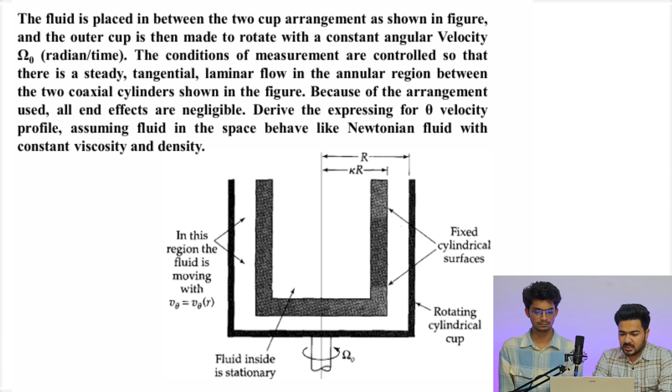So now as we have read the problem, we can see that this problem describes a classic fluid mechanics scenario known as the Couette flow of coaxial cylinder system. This type of flow occurs between two infinitely long coaxial cylinders where one cylinder is stationary and the other rotates with an angular velocity. We need to find its velocity profile and flux profile.

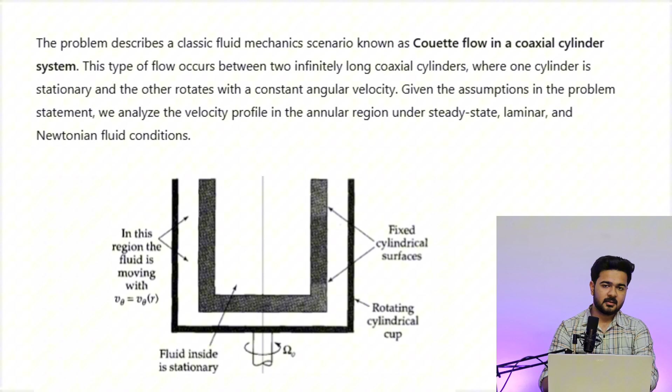So let us list out the assumptions which will be necessary for this problem. To derive the velocity profile equation, we have made several assumptions. Let us list them down.

Firstly, the flow is steady state. That is given in the problem. The explanation is that the system is assumed to be at steady state, that is the velocity does not change with time: del v theta by dt is 0, meaning v theta velocity is not changing with time. The outer cylinder rotates at an angular velocity omega naught, and the inner cylinder is stationary. Since there are no transient forces or time dependent inputs, the flow remains unchanged over time.

In real world application, if the outer cylinder suddenly starts rotating, the flow would initially be unsteady. However, after a short time, the system reaches an equilibrium steady state and velocity stops changing with time. So we are assuming that the system has already reached its steady state - we have started the problem when it has already reached steady state.

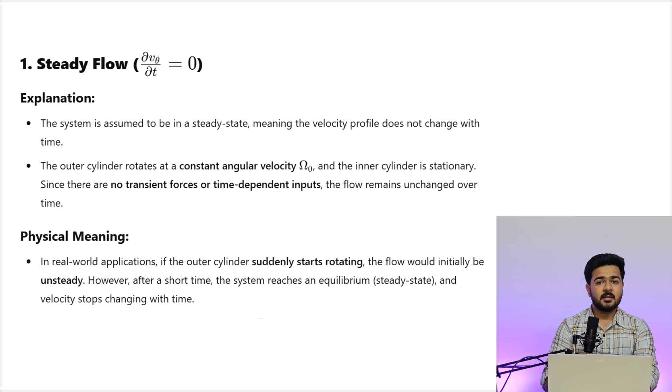Secondly, the flow is axis symmetric, that is, it is symmetric around theta. So velocity theta is not changing in the theta direction, that is del v theta by d theta is equals to 0. So there is no dependence on angular coordinate theta because the system is cylindrically symmetric.

Cylindrically symmetric: the fluid velocity at a given radius r is the same at all angles around the cylinder. Since the problem involves a rotating outer cylinder and a stationary inner cylinder, no preferred direction exists in theta, meaning velocity changes only in the r direction and not in the theta direction.

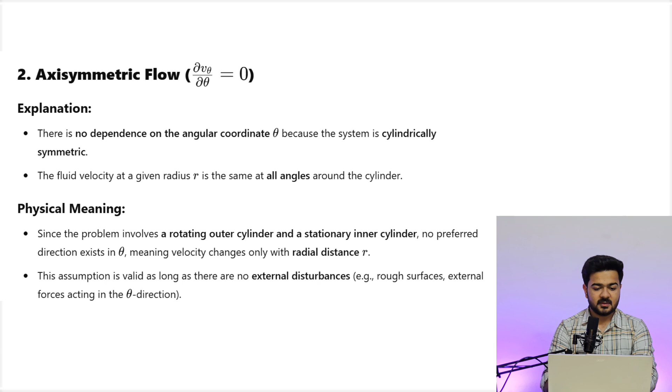This assumption is valid as long as there are no external disturbances, such as rough surfaces or external forces acting in the theta direction.

The third assumption is that the flow is fully developed, that is, del v theta by del z equals 0. This means v theta is not changing in the z direction. The system is assumed to be infinitely long in the axial direction, meaning flow properties do not change along z, since the coaxial cylinders have infinite length. Velocity only varies in the r direction.

Physically, if the cylinders are very long, then far from the ends, fluid elements experience the same forces everywhere along the axis, meaning forces in the z direction are the same everywhere in the fluid. This assumption is used in practical problems where end effects, that is entrance and exit effects of finite cylinders, are negligible, so v theta is not changing in the z direction.

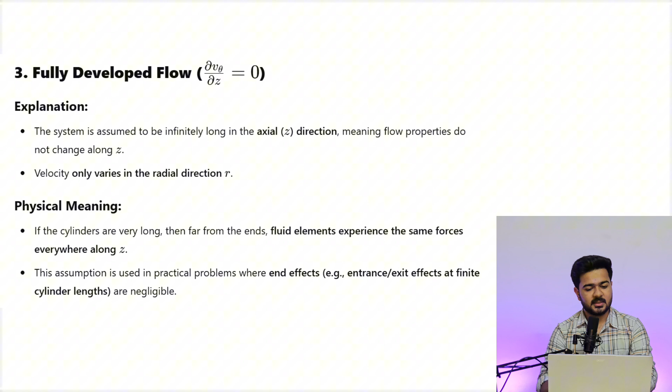The fourth assumption is that the fluid is Newtonian, with constant viscosity, so we can apply Newton's law of viscosity in the problem: tau, the momentum flux, equals mu

times dv by dy, that is velocity differentiated with respect to y, where tau is the shear stress directly proportional to the velocity gradient. This means the fluid has constant viscosity, that is, the fluid is Newtonian.

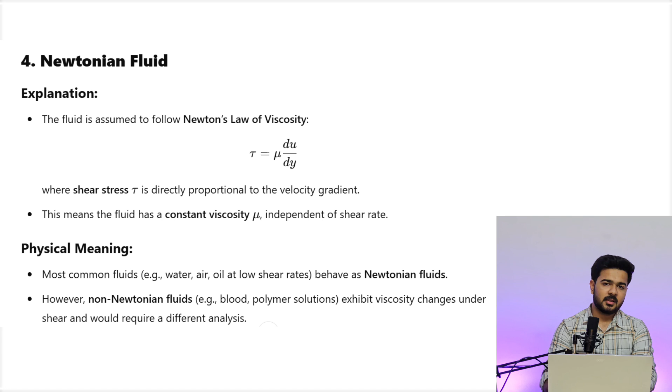Physically, the most common fluids, such as water, air, and oil, behave as Newtonian fluids at lower shear rates. However, non-Newtonian fluids like blood or polymer solutions exhibit viscosity changes under shear and require a different analysis, since for them we cannot use Newton's law of viscosity and need a different approach.

The fifth assumption is that there is no radial and axial velocity, meaning the velocity in the r direction and the velocity in the z direction are zero. The fluid moves purely in the tangential theta direction, so the flow is only in the theta direction, as given in the problem.

There is no radial flow component, Vr, because the wall prevents movement towards or away from the center. And there is no axial flow component, Vz, because the problem is radially confined and assumed infinitely long.

Physically, if there were a pressure gradient in the radial or axial direction, additional velocity components Vr or Vz would arise. But here we assume the pressure throughout the liquid is constant, since it is an infinitely long cylinder and properties are not changing, so Vr and Vz are 0.

However, in this problem the flow is purely rotational and driven only by the motion of the outer cylinder, making the assumption valid, since we are not considering the effect of gravity.

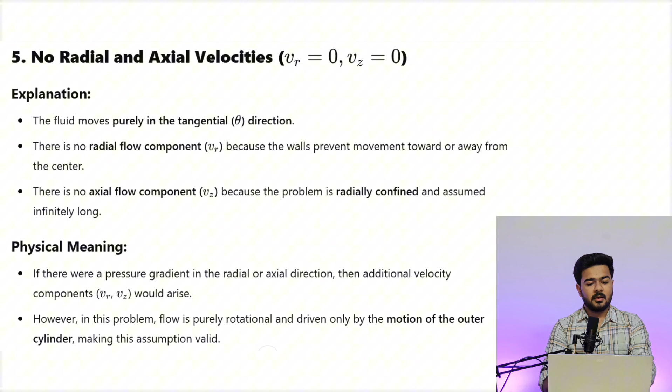The sixth assumption is negligible pressure gradient, that is, del p by del theta equals 0. We are assuming that pressure is not changing in the theta direction.

There are no external forces in the tangential direction except for the shear force from the rotating outer cylinder, so there is only the drag force through the walls of the rotating outer cylinder.

If there were a pressure gradient in the theta direction, it would introduce additional tangential forces, but in our case it is not like that. Physically, in Couette flow between moving plates or cylinders driven by shear, motion is not pressure driven, it is only driven by the drag of the moving boundary of the cylinder.

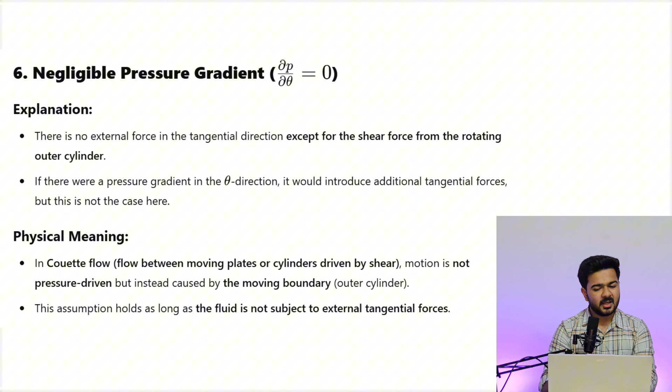Here, in our case, it's the outer cylinder. The assumption holds as long as the fluid is not subjected to external tangential forces, so here we are not taking any tangential forces; our system is at steady state.

The seventh assumption is no-slip boundary conditions. We consider that there is no slip between the fluid's last layer and the layer of the wall, meaning they are rotated at the same velocity, so there is a no-slip condition.

It is written that the no slip condition states that the fluid in contact with a solid surface has zero relative velocity with respect to the surface, that is the same meaning. At the inner stationary cylinder, where r equals kappa r, the tangential velocity is 0, that is v theta at kappa r equals 0.

At the outer cylinder, where r equals capital R, the tangential velocity matches the velocity of the cylindrical wall, that is omega naught times R. This is the velocity of the outer cylinder, and the fluid's last layer also moves with the same velocity, so there is no slip between them.

The assumption is experimentally valid for viscous fluids that we are using, like water and oil, all of which are incompressible. At the molecular level, fluid molecules stick to the solid surfaces, creating a boundary layer that enforces this condition.

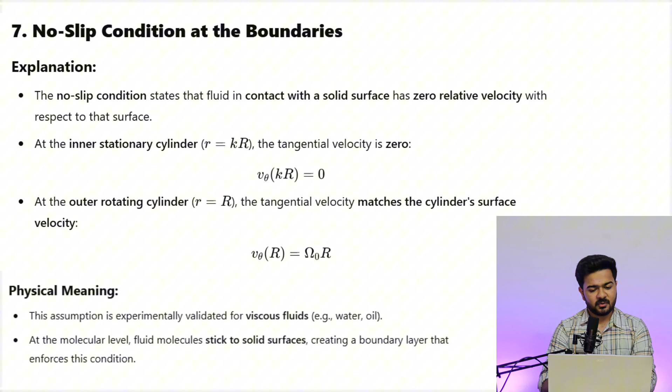Our eighth assumption is that the flow is laminar. The explanation is that the analysis assumes the flow is laminar, meaning fluid layers move smoothly without chaotic mixing. This is only a one-dimensional flow, and it is a laminar flow.

There are no turbulences, and the Reynolds number is given by rho v theta r by mu, and the Reynolds number remains in the laminar region, that is less than 2000, in cylindrical geometry.

If the outer cylinder rotates too fast, the flow may become turbulent, introducing additional fluctuations. But here it is stated in the question that the cylinder is moving at a slow speed. The assumption is valid when rotation speed is moderate and the fluid viscosity is high enough to damp turbulence. So it is valid when the speed is moderate, and we have assumed that it is a slow speed.

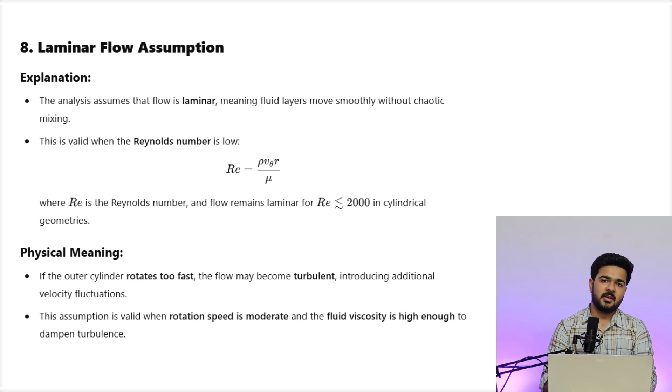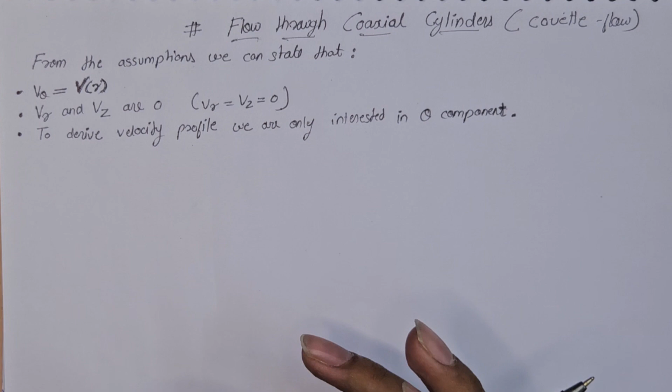So in our case, the flow is laminar, and all these assumptions are valid. From the assumptions, we state that v theta is a function of r only. As v theta is only a function of r, this is due to the 1D laminar flow, and as the velocity is symmetric within the theta direction, velocities in the z direction are 0.

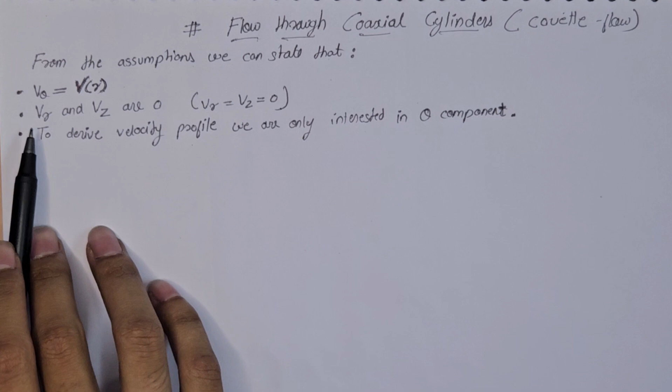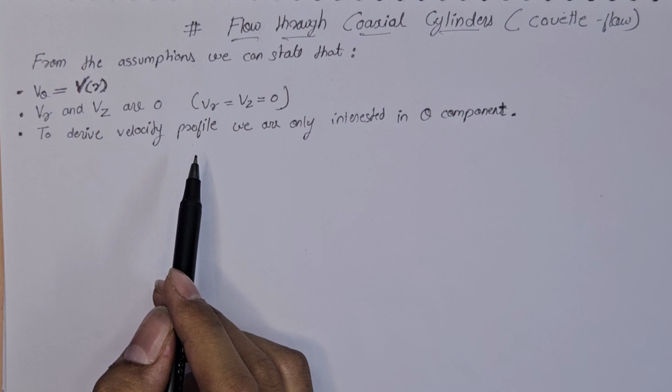Again, Vr and Vz are 0, because of the negligible end effects. To derive the velocity profile, we are only interested in the theta component, because the velocities in the r and z directions are 0.

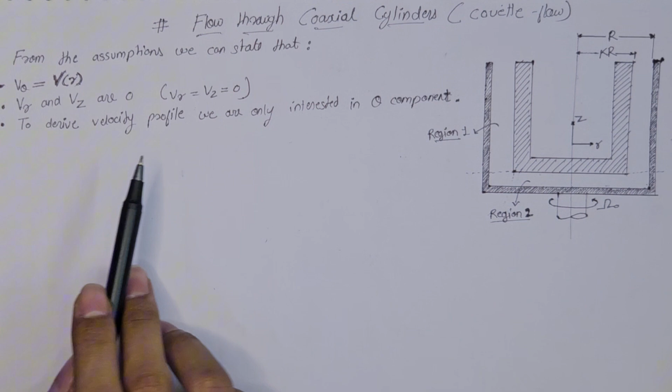Now we will use the Navier-Stokes equation in cylindrical coordinates, using the theta component to derive the equations. Let's write the theta component.

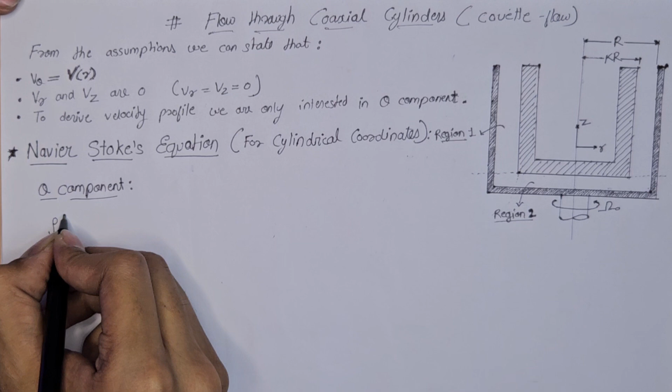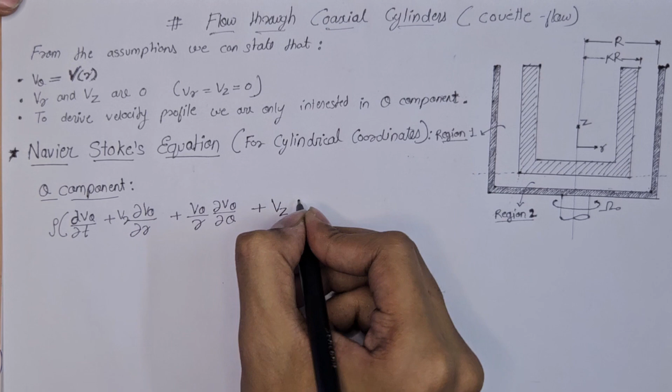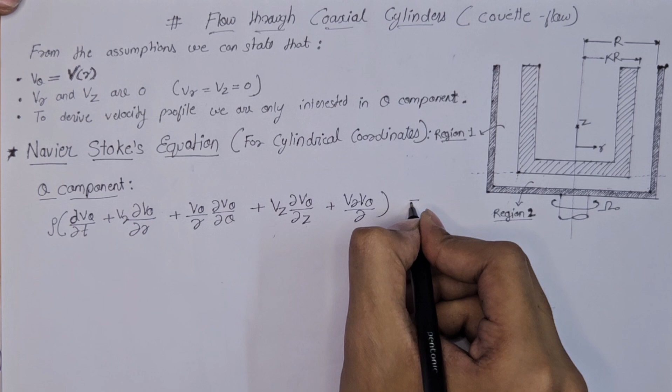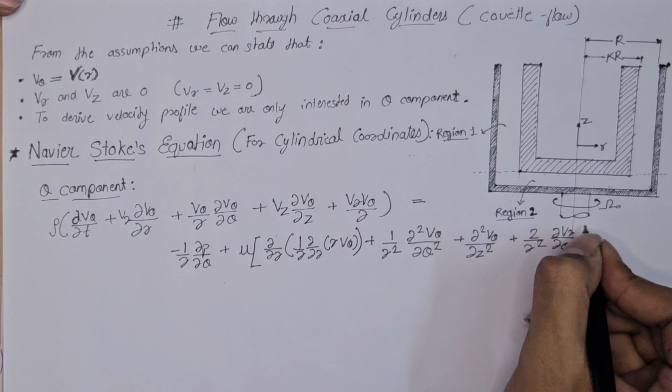The equation of the theta component can be written as: rho times [del v theta by del t plus vr del v theta by del r plus v theta upon r into del v theta by del theta plus vz into del v theta by del z plus vr v theta upon r], which is equal to minus 1 by r del p by del theta plus mu times [del by del r of (1 by r del by del r of r v theta) plus 1 by r square del square v theta by del theta square plus del square v theta by del z square plus 2 by r square del vr by del theta] plus rho g theta.

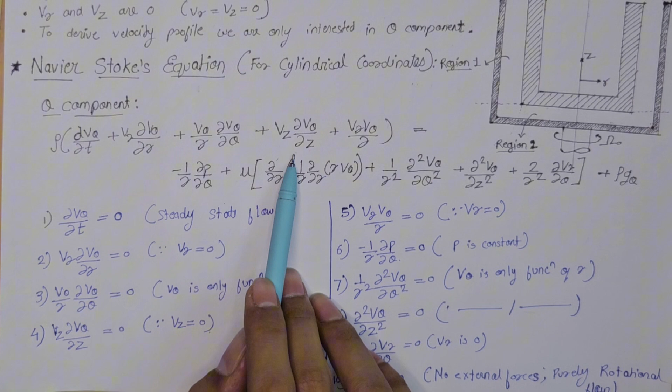Now you can see here we have written the Navier-Stokes equation for the theta component. One by one we'll try to understand how we will use this equation, how these terms will get cancelled, and what the output of this equation will be.

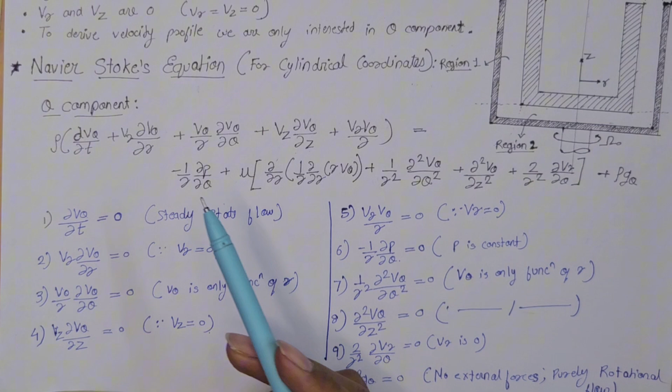As we see here, the first term, del v theta by del t, equals 0. This is because of steady state flow, so we'll cancel this term. Secondly, vr del v theta by del r is again 0. This is because we are given that Vr is 0, so that whole term will be cancelled.

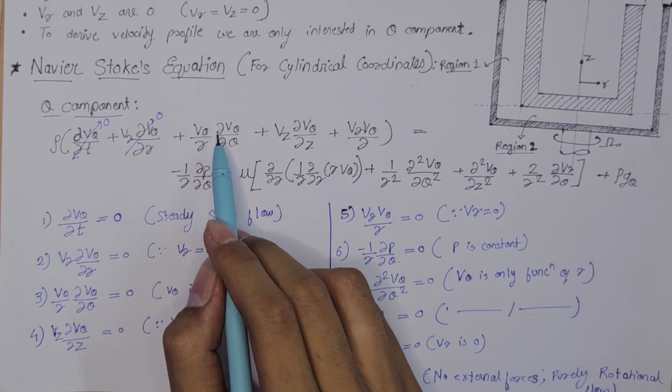Next, v theta by r del v theta by del theta. This is 0 because v theta is only a function of r, so when we differentiate this with respect to theta, it will be 0. So again, this term will be 0.

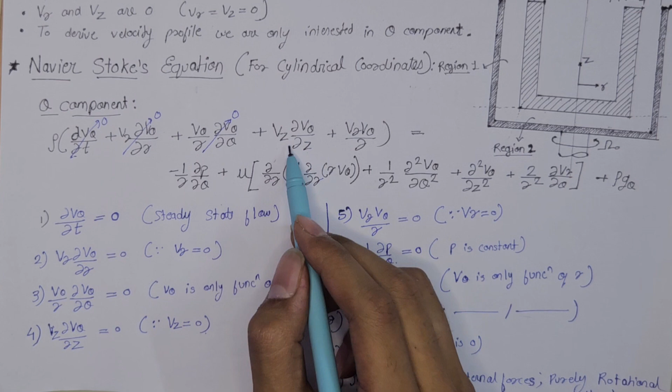Now we can see here Vz into del v theta by del z is again 0. This is because the value of Vz is 0 as we have stated in assumptions. So we cancel this term, this will be equal to 0.

Again similarly Vr into v theta by r is equal to 0. This is because Vr is 0. So again this term will be 0.

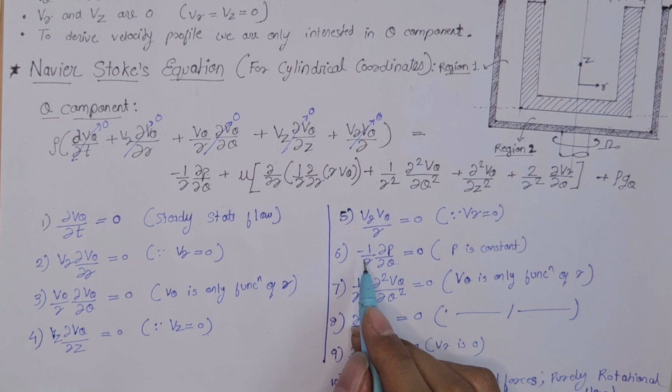Now let's come to the right hand side. So minus 1 by r del p by del theta is equal to 0. This is because the p here is constant. So minus 1 by r del p by del theta is equal to 0, and we'll cancel this term.

Now this term is non-zero because it's not satisfying any of these assumptions above. We'll move on to the next term.

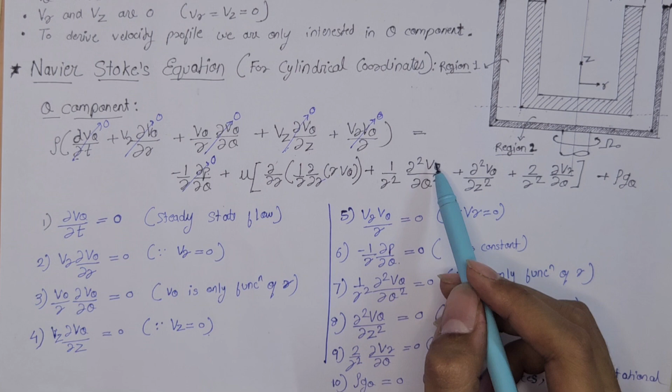1 by r square into del square v theta by del theta square. This is 0 because again the same reason that v theta is a function of r, and if we differentiate this with respect to theta, it will give 0. Again this term will be 0.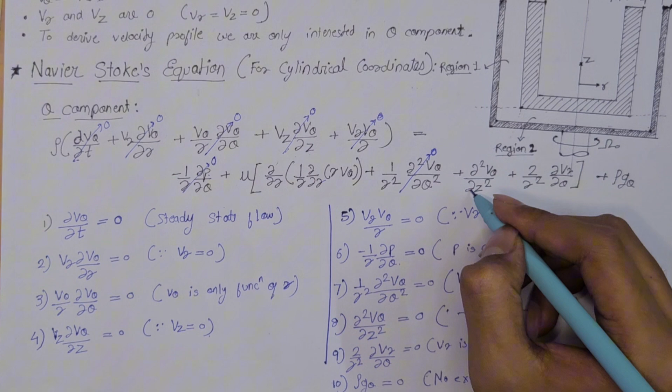Next, del square v theta by del z square. It's again 0, the same reason, v theta is only a function of r. So again we'll get this as 0.

So again the next term, 2 by r square del Vr by del theta, is again a 0 term. This is because Vr is 0 here.

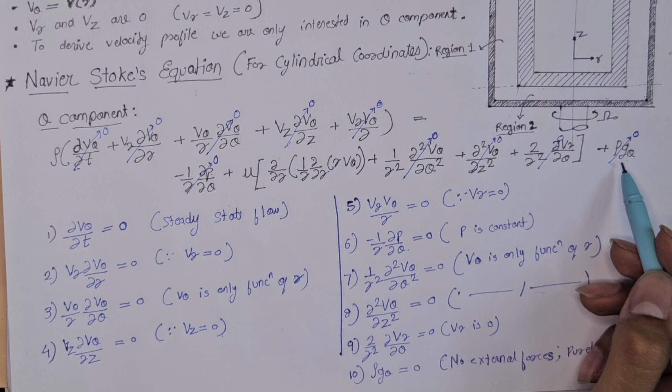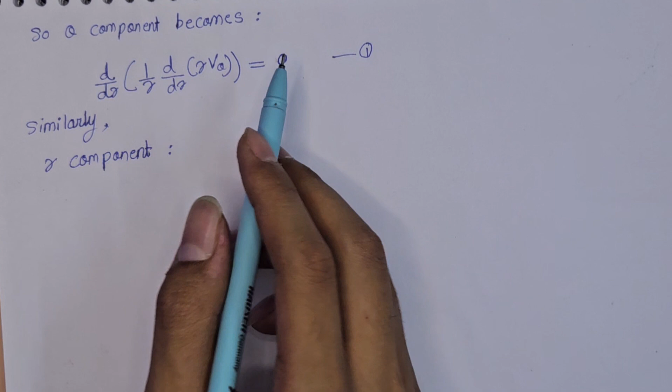And now coming to the last piece, we have rho g theta. This is 0 because there are no external forces and the flow is purely rotational. So we consider this as 0. So by reducing here, we are only left with this term.

And similarly, we can also perform it for the r component. So we have written here the r component equation, Navier-Stokes equation. Similarly, we can also see here that this first term is also 0 because Vr is 0. So this turns out to be 0.

Second term is also 0, this is because Vr is 0. It also turns to 0. And the third term, v theta by r del Vr by del theta, is again 0 because Vr is again 0.

And the fourth term, Vz del Vr by del z, is again 0 because Vz is 0.

Now the next term, this term is non-zero because v theta is a function of r, and this is not 0. And the next term is not 0 because pressure is changing in the r direction, so the value of this differential will be a non-zero value.

Coming to the next, these values will also be 0 because Vr is 0. This term will also be 0 because Vr is 0. And this term will also be 0 because v theta is a function of r, so the differential will be 0, and this will also be 0 because it's purely rotational flow.

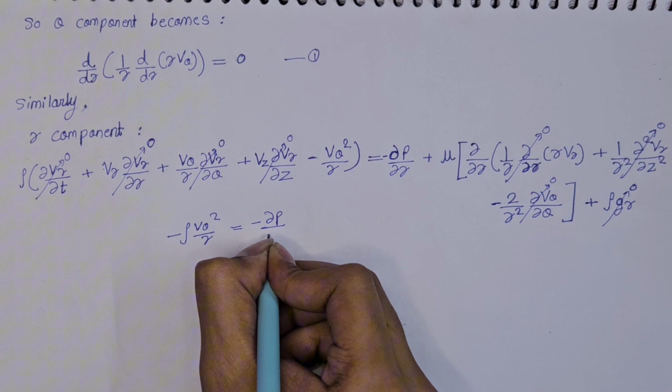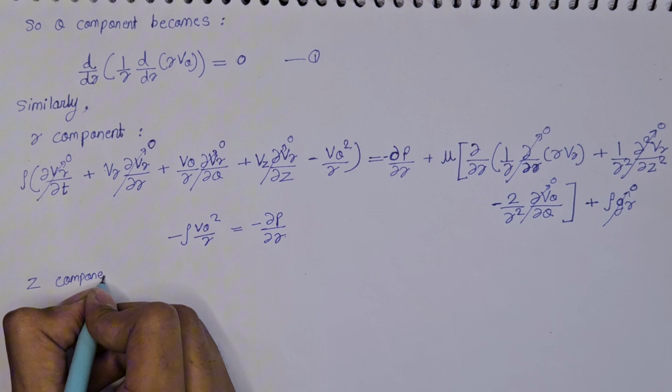And again, similarly, we can also write this for the z component. So for the z component, let us see here that again this term is also 0 because vz is 0.

This term also becomes 0 because vr is 0. Similarly, this term also becomes 0 because vz is 0, and again this term will also be 0 because vz is 0. This term is non-zero because...

pressure is changing in the z direction also, so this is a non-zero value. And again this term also becomes 0 because vz is 0. Similarly, this also becomes 0 as vz is 0.

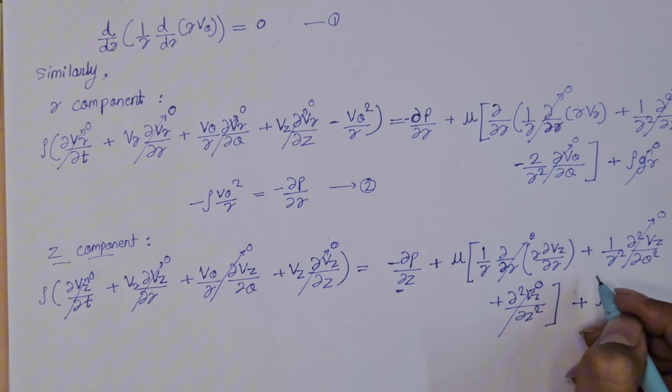Same reason for this also, as vz is 0, and this will be a non-zero term because the gravity is acting in the z direction. So writing this, we get minus del p by del z plus rho g z is equal to 0. We'll give this as equation 3.

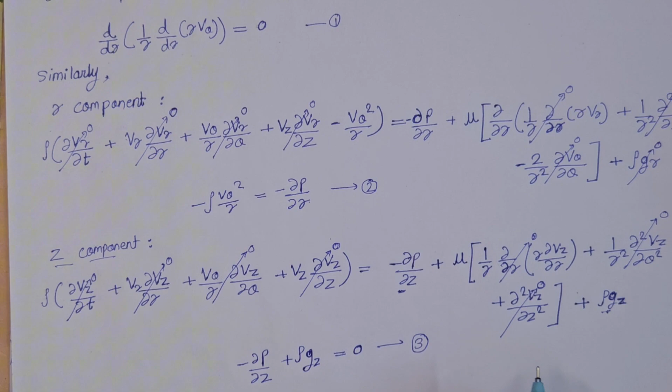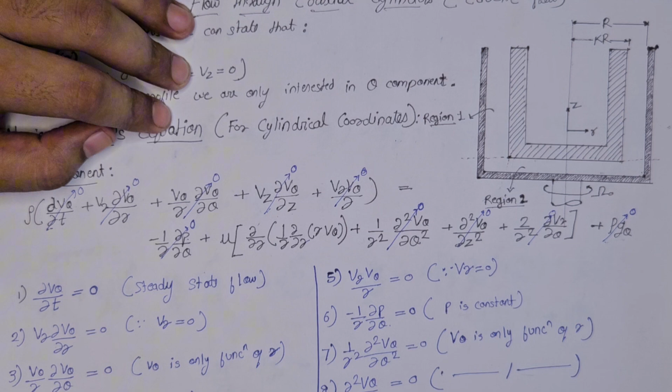So now let us see the boundary conditions for a region. Considering region 1, we can see that our first boundary condition can be at r equals kappa r, that is at the wall of the inner cylinder, the velocity, that is the v theta component, is 0 as our inner cylinder is stationary. So here there will be no velocity of the fluid, the velocity of fluid here will be 0.

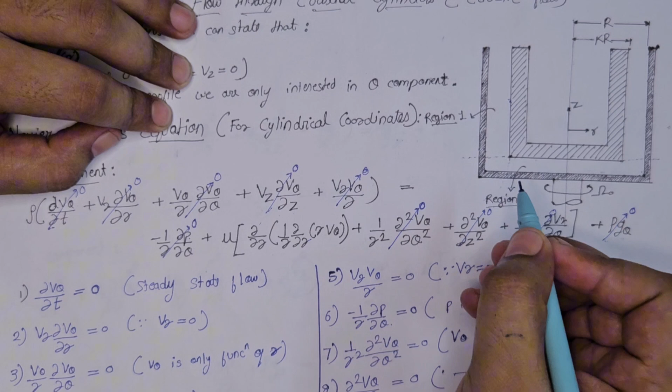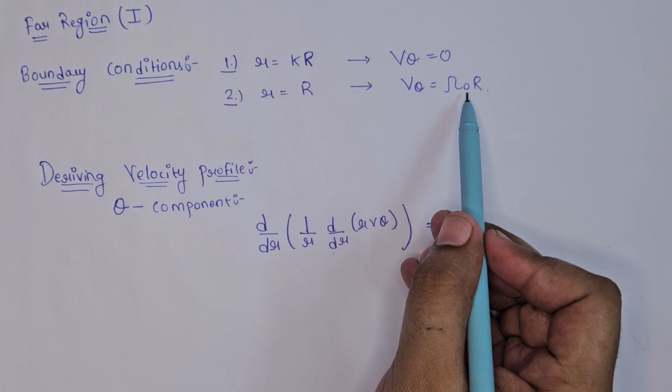The second boundary condition we consider is at r equals capital R, the wall of the outer cylinder, where the velocity v theta component will be maximum and equal to the velocity of the outer cylinder, that is omega naught r. So we have the boundary condition: at r equals k R, v theta equals 0, and at r equals capital R, v theta equals the angular velocity of the outer cylinder, omega naught, into the moment arm r.

Let us derive the velocity profile for region 1. The theta component we are left with is d by dr of (1 upon r d by dr of r v theta) equals 0. Let us integrate this equation.

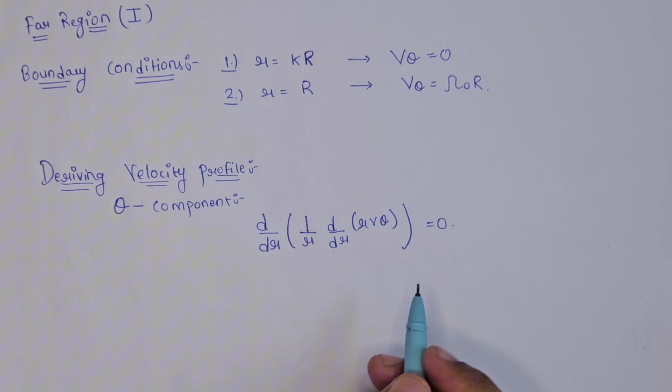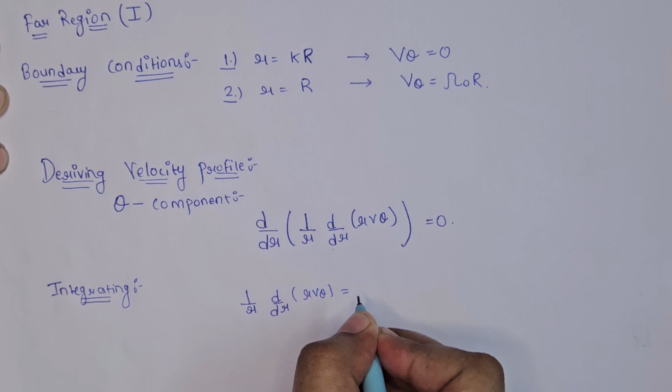On integrating, we get 1 upon r d by dr of r v theta equals c1. This is the first equation. On further integration, we get r v theta equals c1 r squared by 2 plus c2, that is v theta equals c1 r by 2 plus c2 by r. This is our velocity profile equation with the unknown constants.

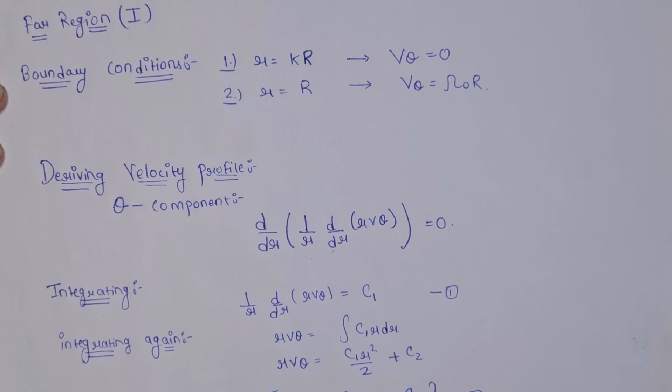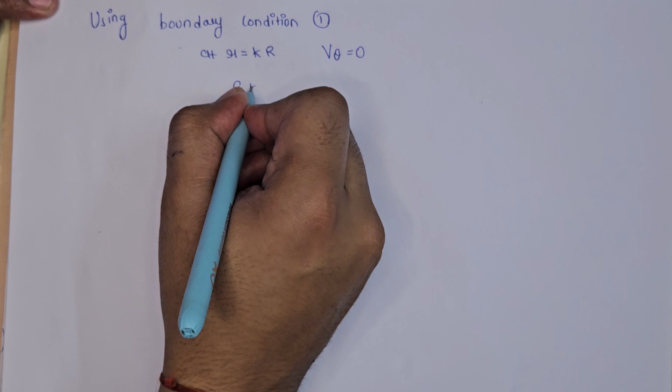Now we have to find the values of c1 and c2 using the boundary conditions. At r equals k R, v theta equals 0, so we get c1 k R by 2 plus c2 upon k R equals 0. Let's call this equation A.

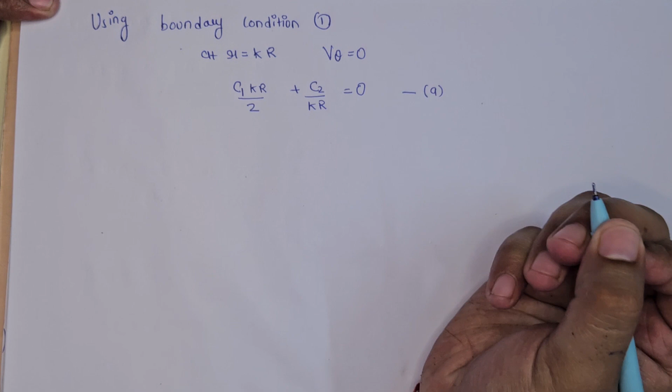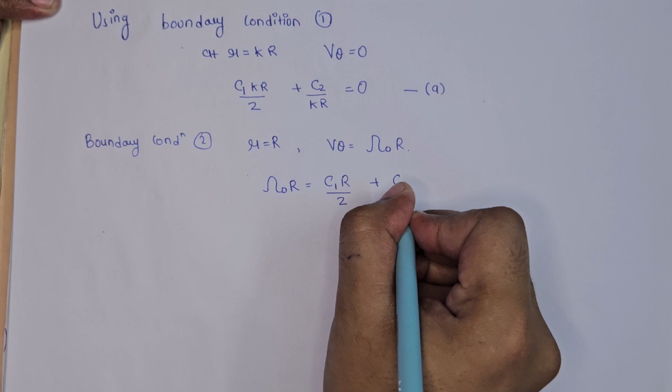Putting the second boundary condition, at r equals capital R, v theta equals omega naught r, we get omega naught r equals c1 capital R by 2 plus c2 by R. Now we have to solve equations A and B simultaneously to get c1 and c2.

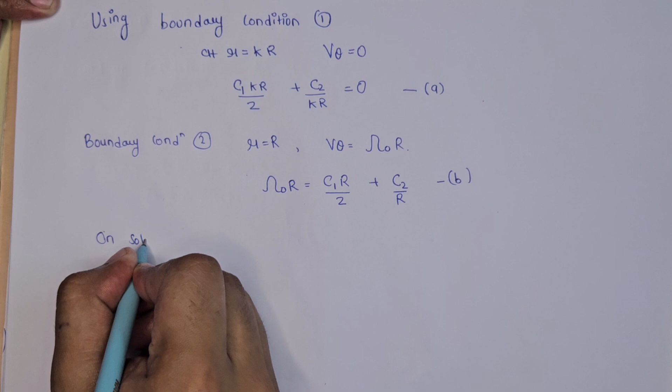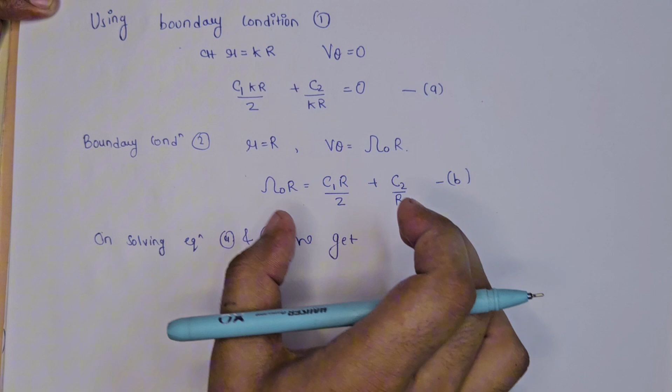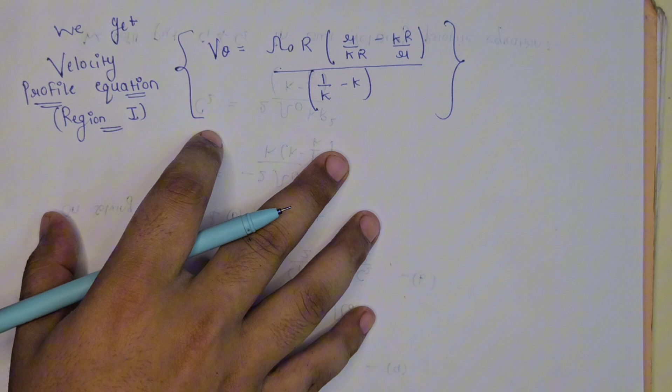On solving we get the constants: c1 equals minus 2 omega naught upon kappa, into kappa minus 1 upon kappa, and c2 equals 2 omega naught kappa r squared upon kappa minus 1 upon kappa. By putting the values of c1 and c2, we get the final velocity profile equation for region 1: v theta equals omega naught r into (small r by kappa capital R minus kappa capital R by small r) upon (1 upon kappa minus kappa). This will be the final velocity profile equation, and through this we will draw our velocity profile, which we will see further.

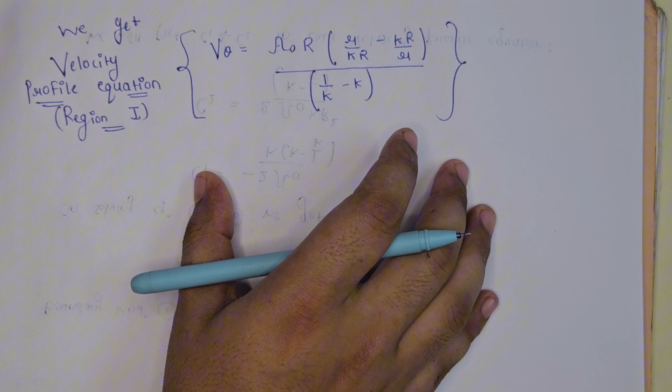Now for region 2, similarly we will do the derivation. We will put the boundary conditions, derive the constants, and get the velocity profile equation.

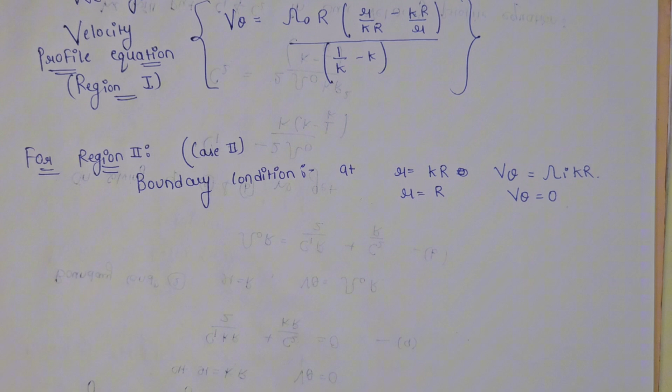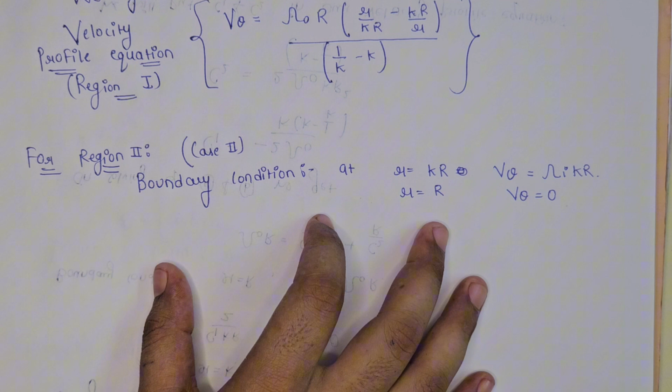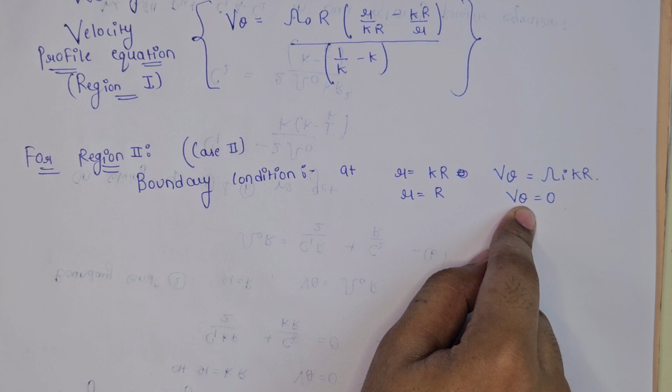We can similarly consider case 2, where the outer cylinder is stationary and our inner cylinder is rotating at a speed of omega I. Here the boundary condition is: at r equals kappa r, v theta equals omega I kappa r, that is at the wall of the inner cylinder the velocity of fluid equals the velocity of the inner cylinder. And at r equals capital R, at the wall of the outer cylinder, v theta equals 0 because in our case the outer cylinder is held stationary.

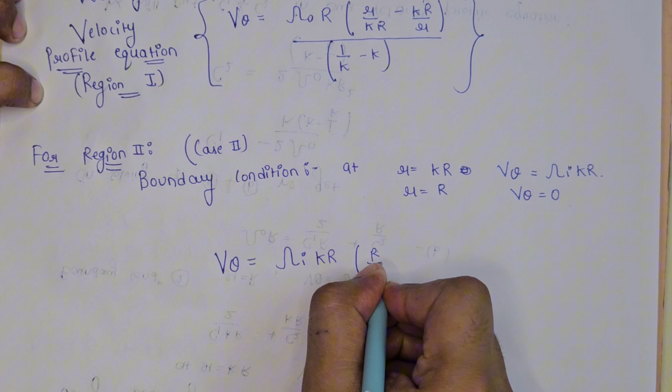By putting these boundary conditions, we get the velocity profile as v theta equals omega i kappa R (R by r minus r upon capital R) whole upon (1 upon kappa minus kappa). This is the velocity profile for case 2.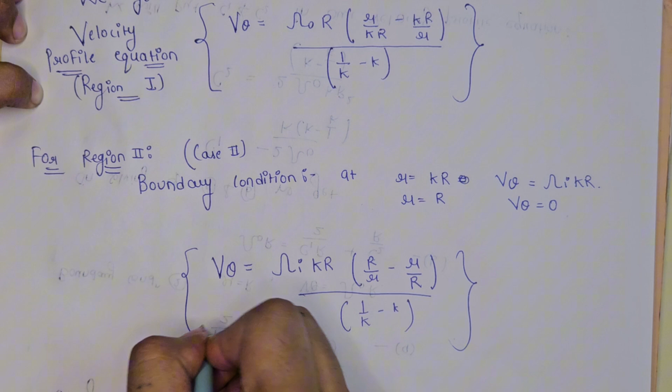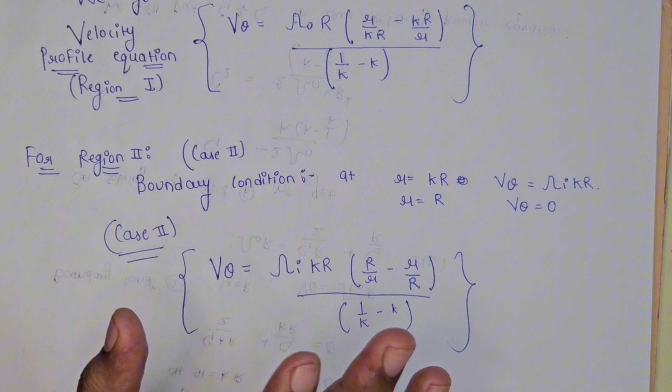But in our problem we have considered case 1, in which the outer cylinder is moving and the inner cylinder is held stationary. So we will only consider that velocity profile, and we will see how it is drawn and how it varies in the region.